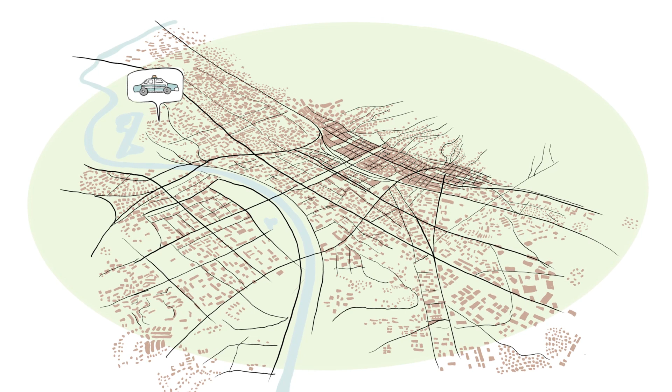In the 20th century, the growth and expansion of the city of Zagreb has left the historic city center neglected and instead developed on the periphery. As a consequence, the capital has become an expansive city with a low population density. Public transport has become inefficient and utility infrastructure expensive to build and maintain.

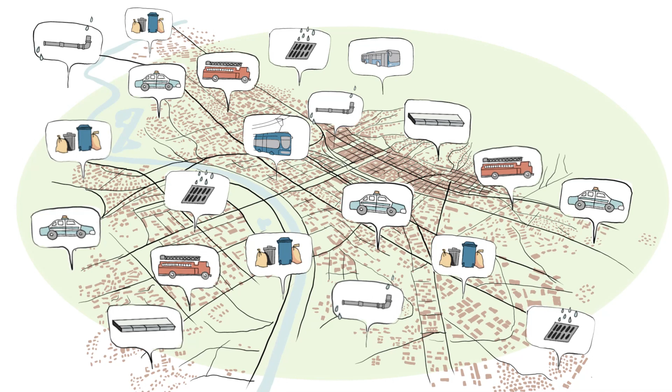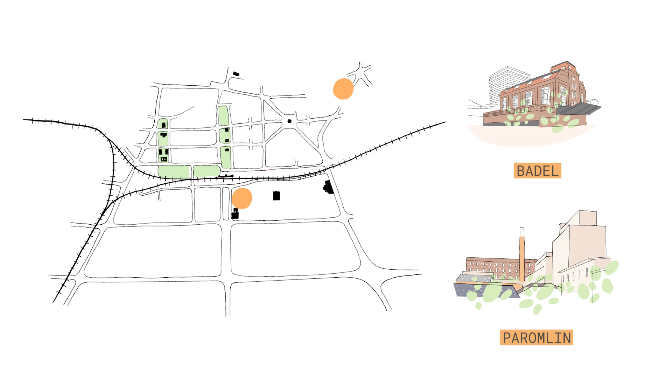At this time, the dense and compact historical core is crying out for a thorough reconstruction, which was confirmed by the recent earthquake in Zagreb. Numerous former industrial sites lying abandoned in the city center today offer a unique opportunity for the first systematic planning in a long time.

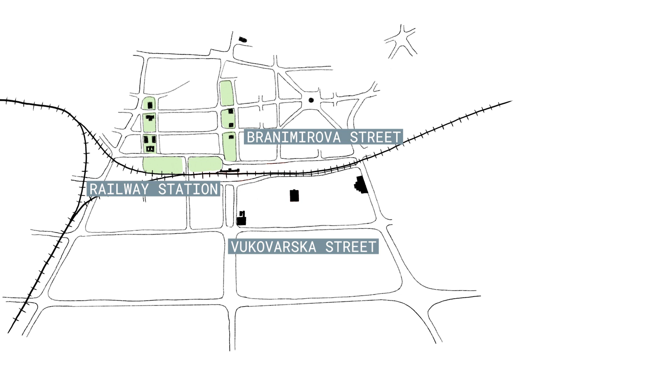The industrial zone closest to the historical center extends between the two main arteries of the city and Zagreb's main railway and bus stations. This area of 45 hectares has one of the most important spatial potentials of the city of Zagreb, and is only 15 minutes walking distance from the city center.

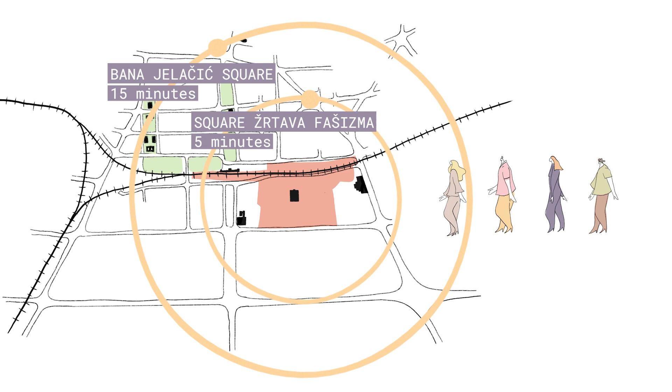The area is twice the size of the center of Dubrovnik, or in terms of the potential number of inhabitants, equal to a smaller Croatian city, such as Čakovec.

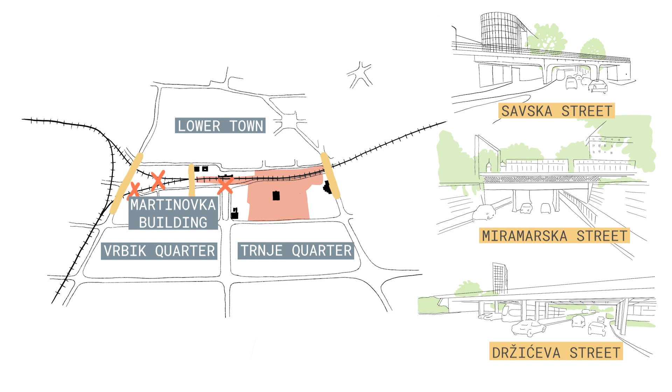The construction of the Gredelj zone is an opportunity to solve one of Zagreb's greatest urban problems, which is the interconnection between north and south. Due to the railway tracks that were historically laid through the center of the city, the north and south of Zagreb are connected only at 3 points.

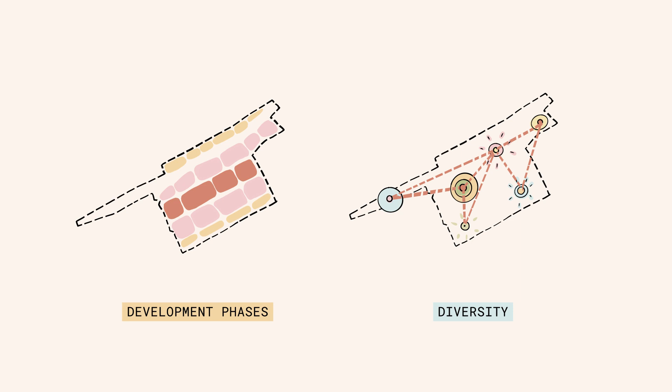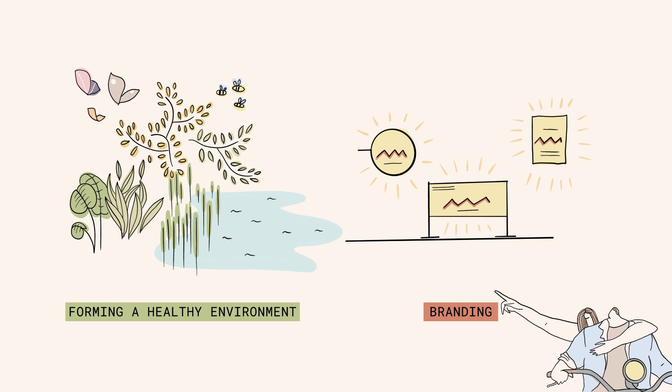Respecting the context and local specificities of Zagreb, the plan adopts modern trends in urban development, which were successfully implemented in many other European cities, such as Munich, Oslo, and Zurich at similar abandoned industrial sites. The results of such projects are a balanced and sustainable urban landscape.

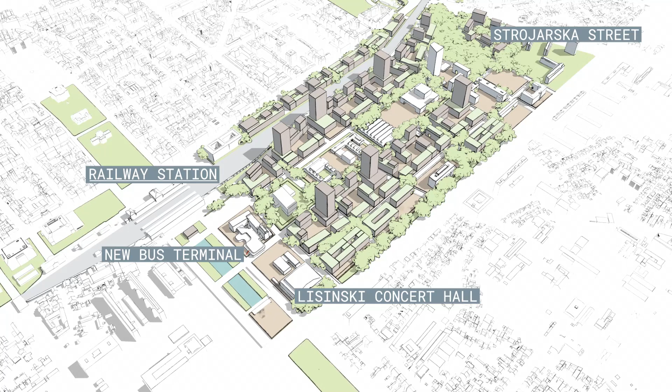The development of Gredelj can be executed in a timely manner, considering that the Gredelj zone has only 2 legal owners, which are public entities of the city of Zagreb and Croatian Railways. This makes integral planning easier. With a systematic approach, Gredelj could become a modern part of the city center.

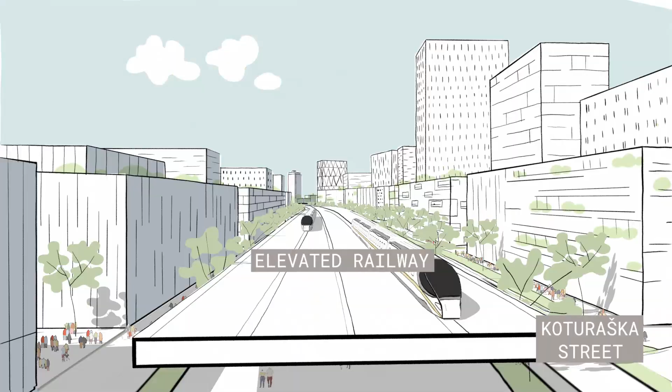Such an environment can offer a better quality of life and work to residents of all ages, lifestyles, and social statuses. In order to achieve a full integration with the historic city center recently damaged by the earthquake, it is necessary to raise the railway tracks in the downtown area, as they are already operating above ground in the periphery of the city. This would allow for a more natural flow of traffic, public transport, and pedestrians.

Investment in the construction of the raised railway tracks is a relatively insignificant infrastructure investment for a city such as Zagreb.

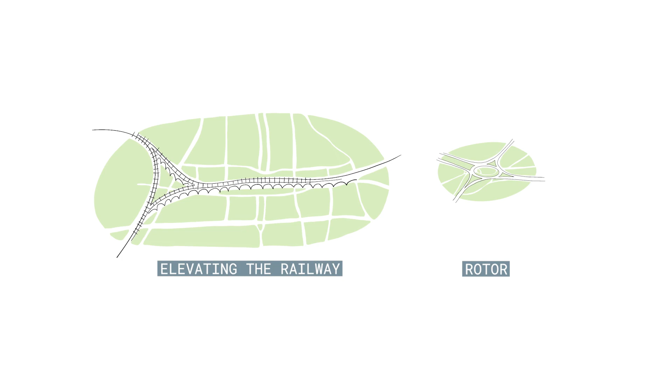A good balance of public amenities and the reconstruction of squares and streets, primarily intended for pedestrians, will transform the area of Gredelj into an attractive and affordable walking zone in the city.

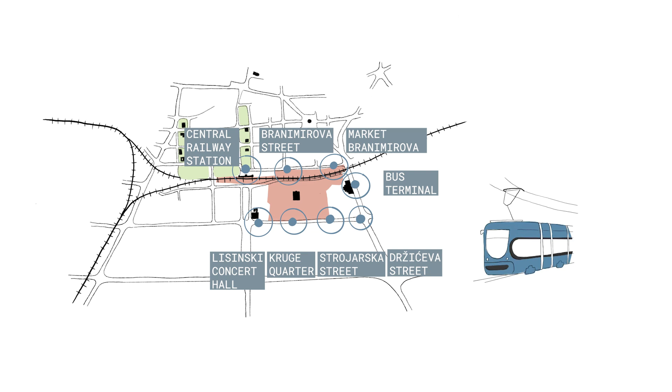Gredelj's strategic location is extremely accessible by public transport and pedestrians alike, making it an attractive hub for both work and living spaces.

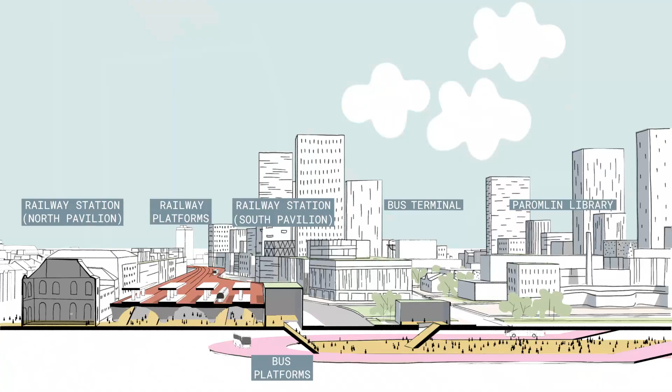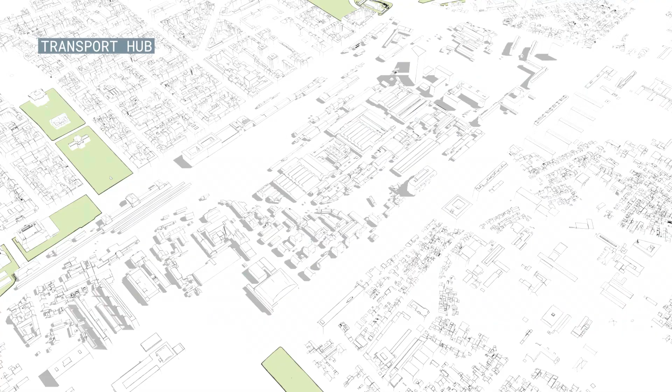Moving the existing bus station underground to the main city access and connecting it to the existing railway station would create a transport hub that facilitates passenger transit and raises Zagreb's profile as a European location for both businesses and student populations. New construction does not mean the deletion of the existing identity of the space.

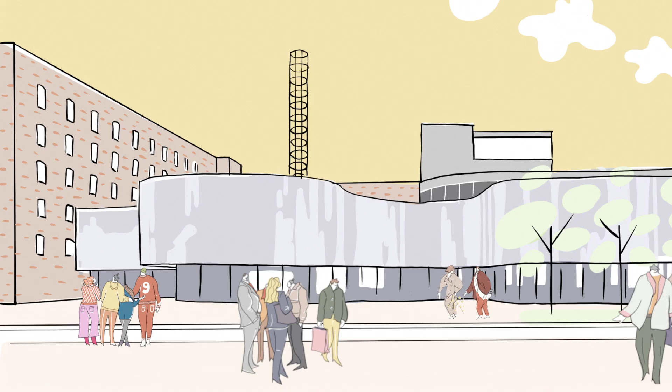The backbone of the site's cultural heritage will be preserved, regenerated, and put into new use, along with the integration of green architecture. The revitalization of the industrial heritage, with cultural and social content, raises the value of the entire location. An example of choosing such a method is the future conversion of the Paromlin site into a city library.

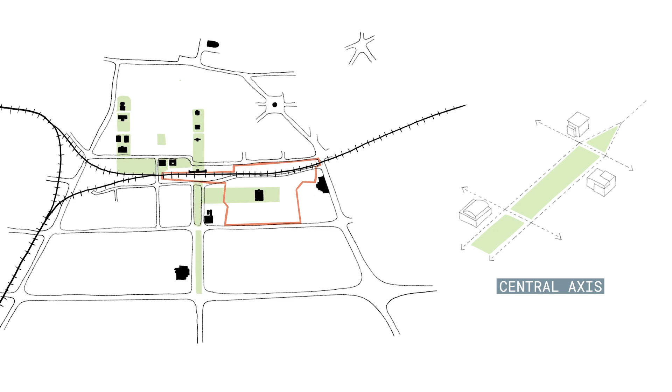The revitalized heritage sites integrated into the public space becomes a modern interpretation, but also a logical extension of the 19th century architect Lenuci's horseshoe series of parks and public spaces in the north of the central railway station building.

Parks and green areas and squares are increasingly permeated with facilities such as markets, museums, or the new Zagreb's HNK nightlife scene, reclaiming the public space.

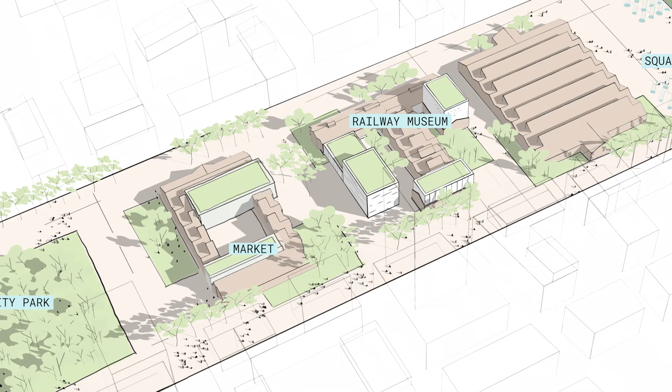This creates a vital and substantially diverse urban environment, with a unique character and a variety of green architecture of enormous importance to the city and its inhabitants, as well as schools, universities, and public administration buildings.

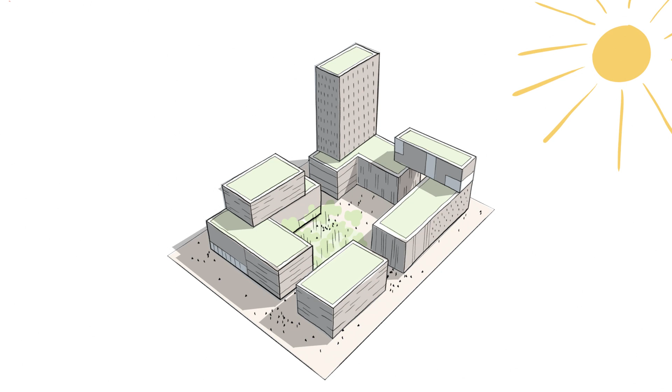The regenerated site is open, interwoven with public squares and parks of the right measure for a newly formed neighborhood. With sustainability at its heart, attention is paid to distribution of green architecture and open space in order to create the most ideal conditions for work and home environments.

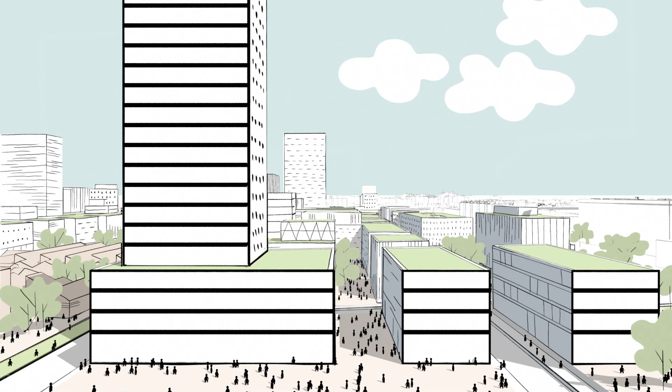The proposed concept design is a framework for designers of individual buildings, whose varied solutions will contribute to the visual diversity of the neighborhood. Various types of green sub-projects are planned for within each block, providing a sustainable mix of usage ranging from education, sports and catering, to

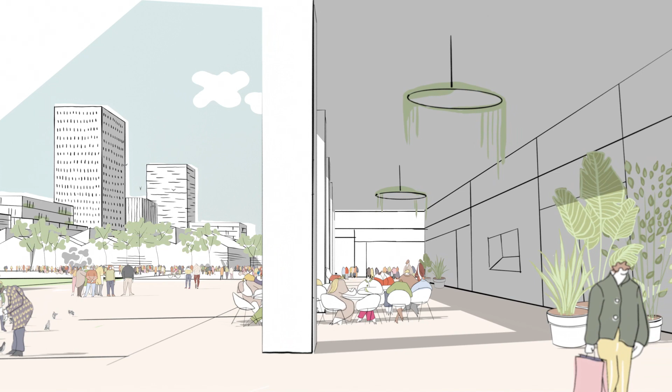business and residential facilities. Such an approach ensures that the activities complement each other, and that the block is full of interesting public amenities on the ground floor, bringing life to the streets.

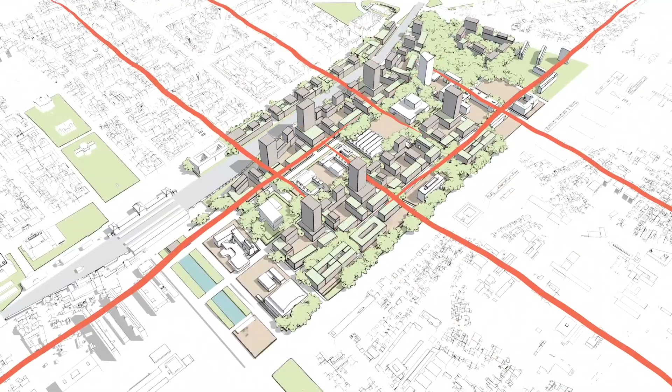The revitalization of the Gredelj site is a project of urban and national interest because it provides long-term benefits for the entire community. Zagreb will be connected as a whole, getting new pedestrian surfaces and at the same time disposing of unused and abandoned industrial sites in the immediate vicinity of the center.

It will become a well-connected transport hub, especially by rail at the time when such a sustainable form of transport has become so widespread in Europe.

The most important aspect is to provide Zagreb's residents with a high quality of life and a green, healthy working environment in accordance with the highest sustainability standards, as well as new public amenities and pedestrian areas in the city center.

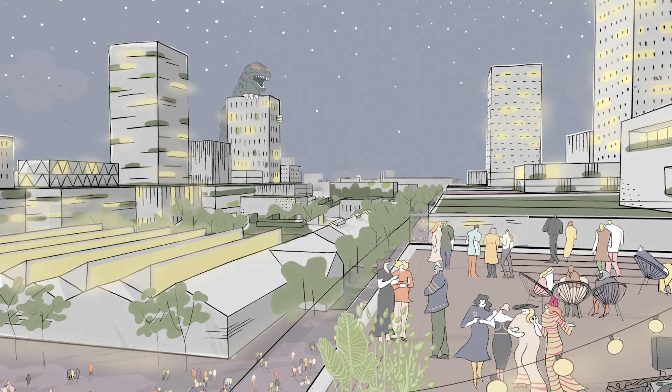Gredelj is an opportunity to create extensive new facilities in the area, which will be available even during the reconstruction of the damaged center.

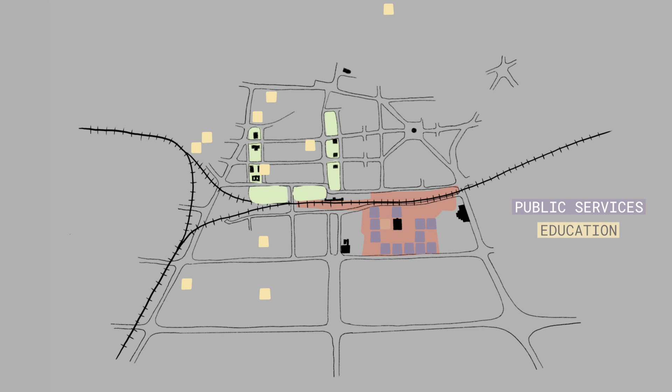With the safety of citizens as its focus, the regeneration should also encourage the reorganization of the scattered public sector services currently in place and relocate them to more appropriate buildings.

This is a moment where there is a need for long-term, environmentally and socially responsible master planning, which will encourage all professions to work together in the rethinking of space for the benefit of the citizens, of future competitiveness of Zagreb as an even more attractive European destination for life and work.